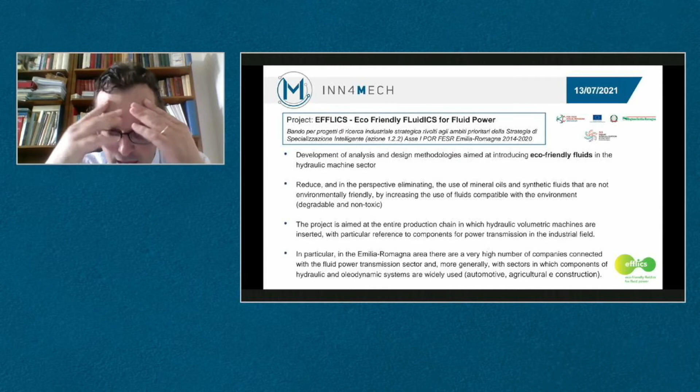This project is a financed, funded project within the Smart Specialization Strategy of the Emilia-Romagna region, which funds projects to develop new technologies that should face some territorial opportunities. In particular, this project is called Eco-Friendly Fluidics for Fluid Power.

It is aimed at the development of analysis and design methodologies in order to introduce eco-friendly fluids in the hydraulic machine sector, and wants to reduce, and in perspective eliminate, the use of mineral oils and synthetic fluids.

To do this, we have chosen and tested a number of fluids with different technologies. The aim is to tackle the entire production chain in which the hydraulic volumetric machinery is inserted.

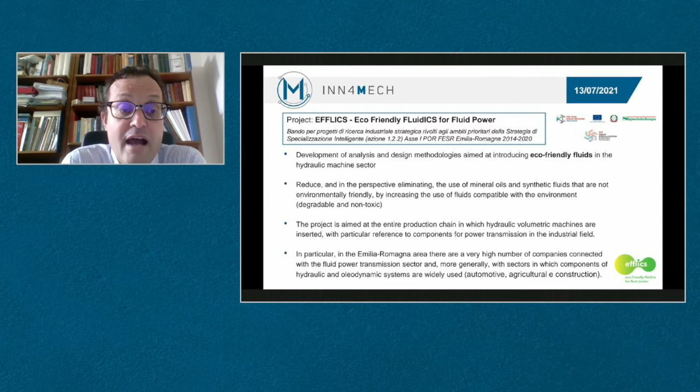In particular within the Emilia-Romagna area, there is a high number of companies connected with the fluid power transmission sector and with sectors in which components of hydraulic or oleodynamic systems are used, such as automotive, agricultural, and construction. As you know, the automotive sector is at a very high level in Emilia-Romagna.

One of the most difficult things to handle with this project is that it is carried out by 4 different entities, which are 4 technology transfer centers: the University of Ferrara, University of Modena Reggio, the CNR STEMS (National Research Council), and the National Research Council ISTEC.

We have 3 supporting companies, OilSafe, Dana, and ZF Automotive Italy, which are supporting this project and giving us the reality check of what we are doing. They are providing real components for testing our technology.

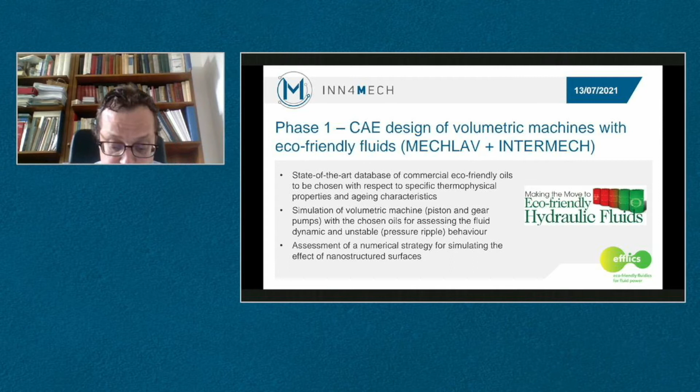The project is divided into 4 different tasks. The first task, phase 1, is the computer-aided engineering design of volumetric machines with eco-friendly fluids.

First of all, we set up a database with oils suitable to be considered for eco-friendly applications. We considered a number of oils, made a database with all the characteristics, and then chose 3 commercial eco-friendly oils: Biohydran TMP46, Biohydran SE46, and HLP synth E46.

We also chose one additional oil, the most eco-friendly oil that can be imagined: rapeseed oil, found alongside these 3 commercial eco-friendly oils. We provided all the partners with these three oils, plus the rapeseed oil.

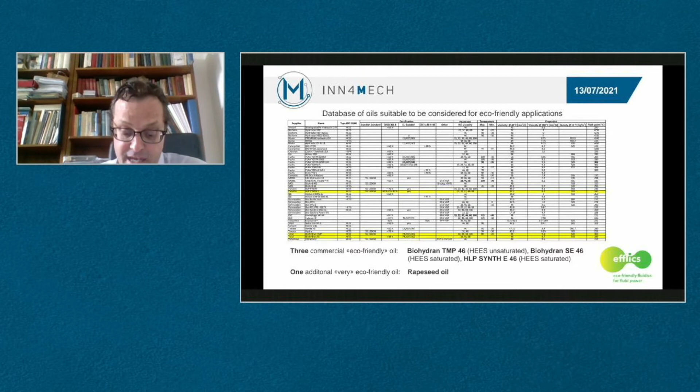The second part of phase 1 was the development of methodology to design a volumetric machine using the most innovative tools available for the development and design of volumetric machines, which are both lumped parameter models and CFD models.

Unfortunately I had an animation here with the CFD, but the slides didn't allow me to show you the video. However, you can see that we reached a very high level of confidence and fidelity in our models.

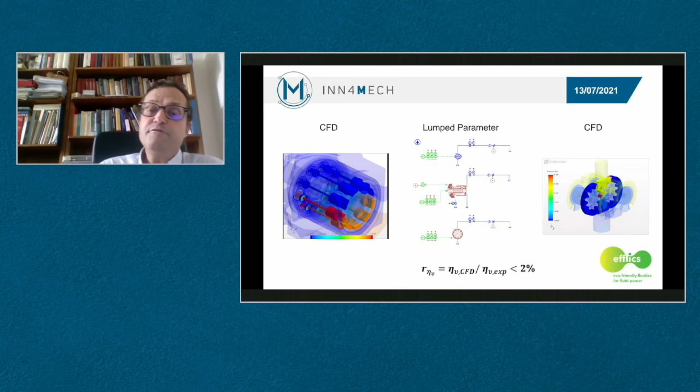The aim is to develop these methodologies with respect to the use of eco-friendly fluids, which have different properties and different behavior compared to traditional oils.

These are other images showing that we tested the oil against classical synthetic oil, finding some improvement in volumetric efficiency. Also, looking at the pressure signature, the pressure ripple of the external gear pump we used, a real geometry coming from ZF, we can compare the different behavior of the three oils.

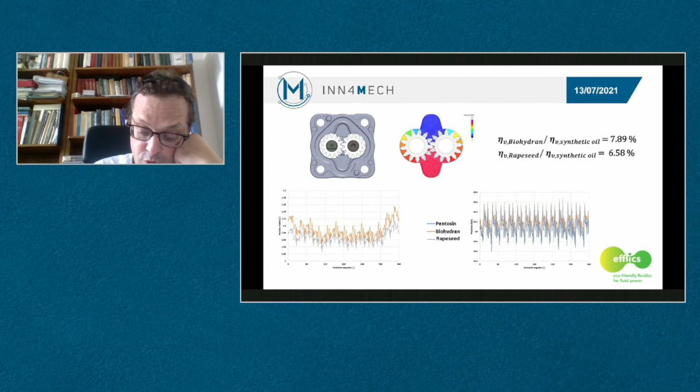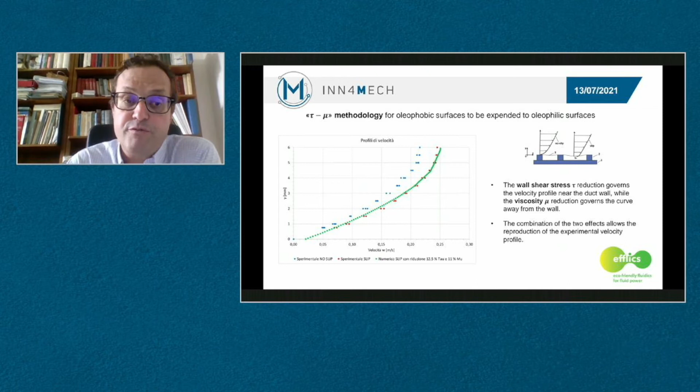We have developed a methodology for simulating with CFD the oleophobic behavior. Why did we develop this methodology for a oleophobic surface? Because the second phase is the use of oleophobic coatings within the volumetric machine in order to enhance the performance of the machines when used with eco-friendly oils.

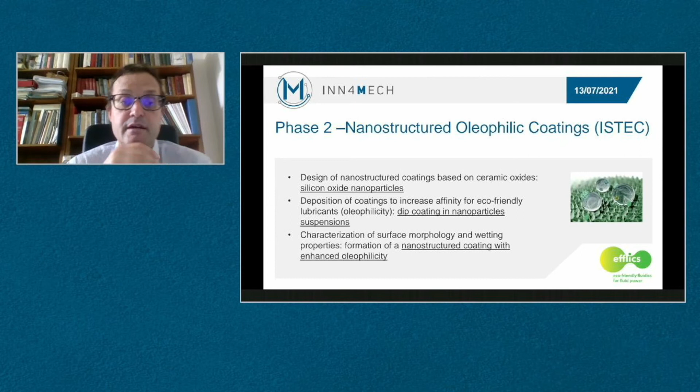Several coatings have been investigated, and at the end the choice was addressed to silicon oxide nanoparticle coatings, because it showed very high oleophilicity towards several lubricants, has a low cost compared to other oxides, and there is wide availability of the commercial product.

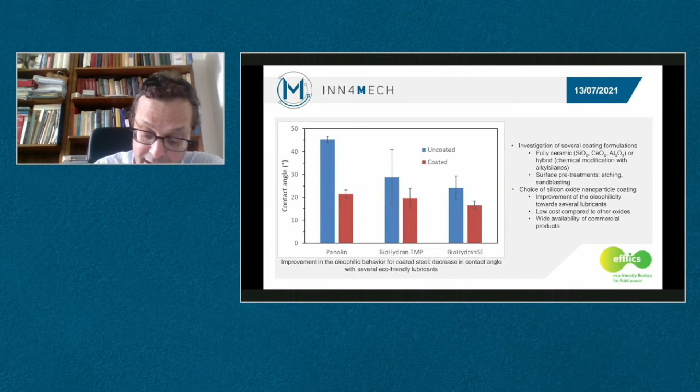So you can see here how the contact angle on the surface changes with the coating, comparing uncoated and coated surfaces. You can see that the contact angle decreases in a quite sensible way. These are images of the coatings that the Research National Council, ISTEC, have applied.

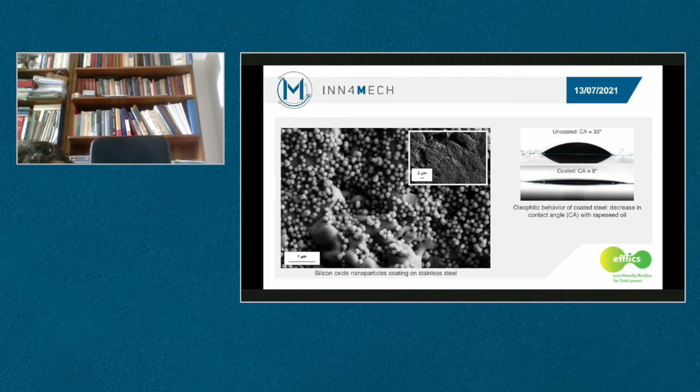They coated stainless steel specimens, and you can see on the right the images of the droplets: uncoated with a contact angle of 33 degrees, and in the second picture, the coated contact angle with only 8 degrees. So a very high, very good oleophilicity. This was made with rapeseed oil.

So the aim is at the end to coat some real components, as we would like - we are coating the swash plate, the slipper, the bushing - and then we will reassemble the setup I showed in the first phase in order to see the effect of the coating.

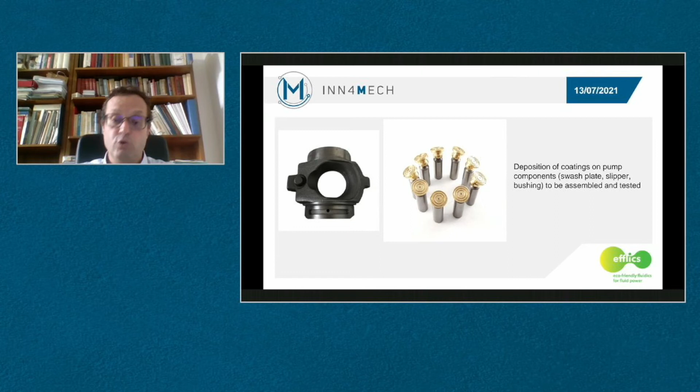The third phase is the development of a sensor for aging assessment of eco-friendly fluids. One of the main problems that could happen to eco-friendly fluids, particularly rapeseed oil or similar oils, is the aging of the oil. So the CNR, the Research National Council STEMS, have developed this kind of electronic nose, which is able to sense the aging of the oil itself.

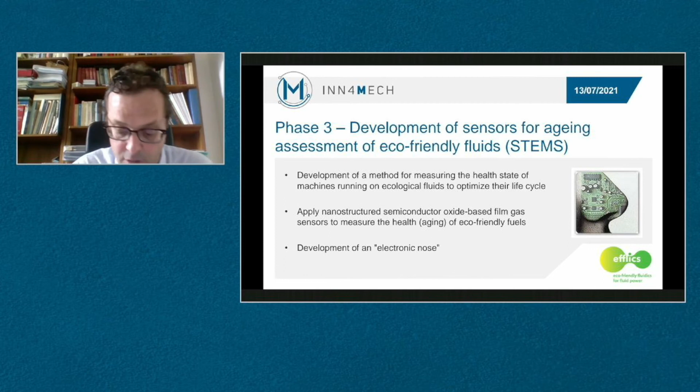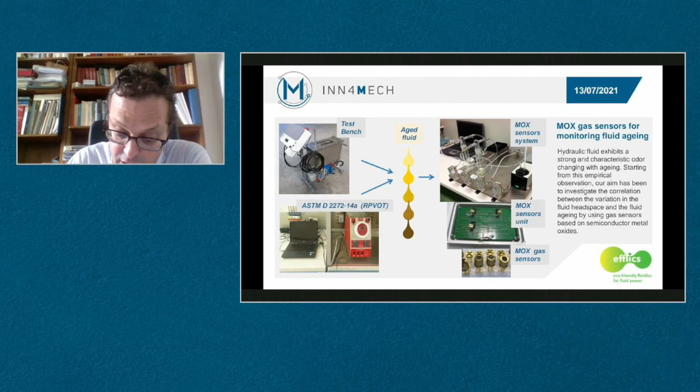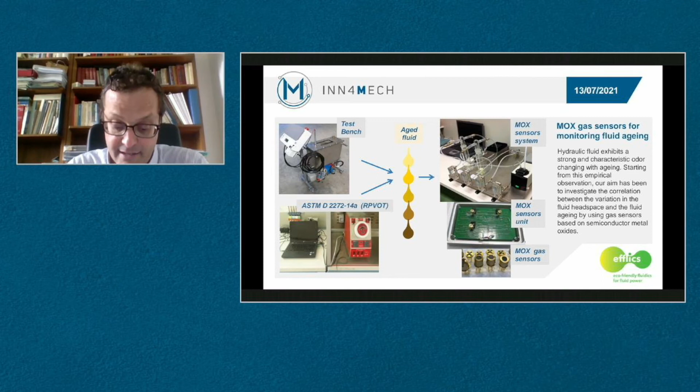The methodology is based on a test bench and an aging procedure which has been supported by OilSafe, the industrial partner. By developing a MOX gas sensor, it is possible to sense the odor of the oil, which changes with aging, so we are able to monitor the aging and have information on the health state of the oil.

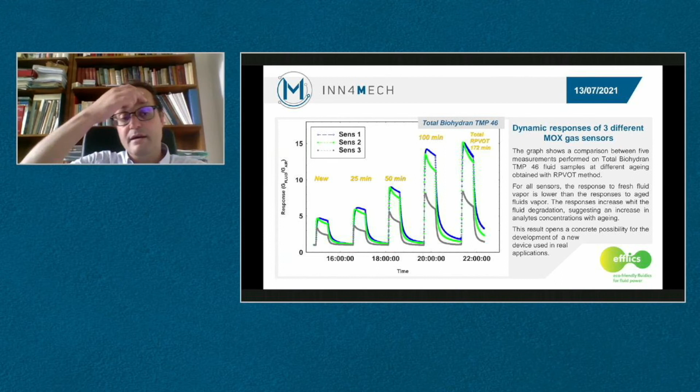You can see in these slides the response of 3 different MOX gas sensors, and you can see that we have validated the method, and we are currently developing and optimizing the sensor.

The fourth and last phase is the experimental testing. We have developed a test rig which is installed at the University of Modena and Reggio Emilia, and we want to make an experimental qualification and monitoring of the influence of the work cycle on the useful life of the environmentally friendly fluids involved.

Then the assessment of any loss of performance of the volumetric machine associated with it, and to test the application of the coatings, and if there are advantages in applying these coatings. And then we want to evaluate the efficiency and effectiveness of the electronic nose.

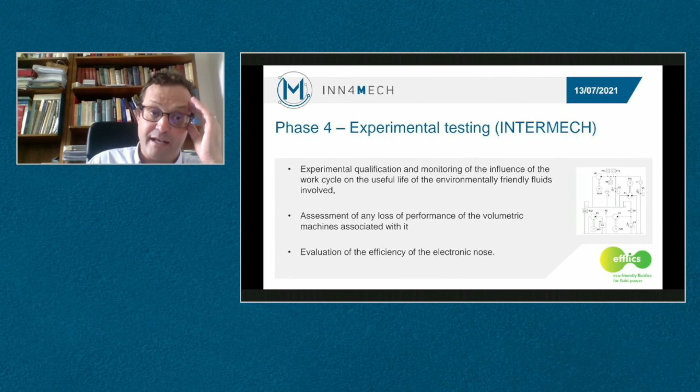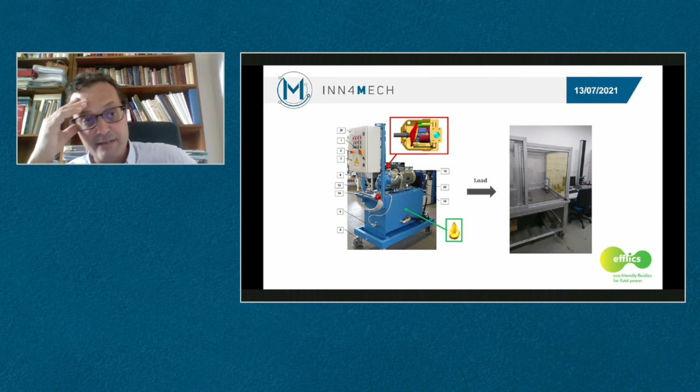So this is the test rig that has been developed, and this is the last phase that will be performed in the next months until the end of the year. So this ends my presentation.

I'm Michele Pinelli, the scientific referent of this project. I would like to say that if you have questions or curiosity on this project, there are a number of questions I can reply to directly, but other questions may be related to phases in which I'm not directly involved - maybe I can forward those to the other researchers involved in the project in order to reply to your curiosities. Thank you very much.